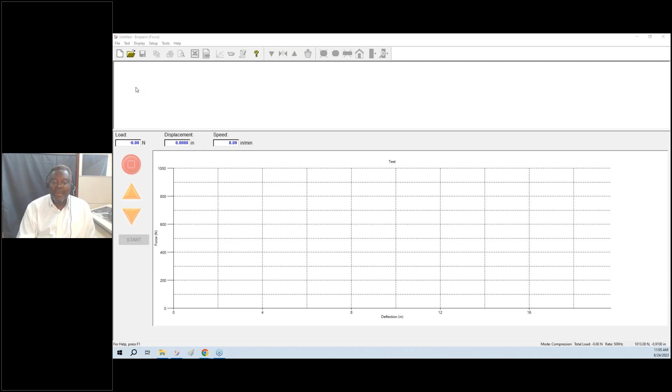So our Emperor software was designed to be simple and complex, depending on what your application requirements are. Simple to use for simple applications and for complex applications in push or pull. Now there is another version of it that does torque, but that's essentially not today's topic.

So we'll be looking at tensile, compression, and 3-point bend testing, which, if you think about it, most applications will fall under one of these 3 umbrellas. Tensile testing can be peel, it can be just pull to break. Compression testing can be push out, penetration testing, sharpness, compressive shear, and so on. And then there's obviously 3-point bend and flexure testing, which we will all look at.

So if you have any legacy type testing program or productivity program, this interface will look familiar as far as starting a new test or opening an existing test and so on. Most of the time, any test application, whether you're testing to a specific testing standard like an ASTM standard or an ISO standard or a mil spec, starts with whatever your preferences are. We'll start in our setup and the preferences.

Now, I'll go over this in general, and then when it comes to the specific testing applications, I'll kind of speed it up a little bit because we've already looked at all of the different preferences. They pretty much don't change. So now in the preferences, this is where you select your type of test.

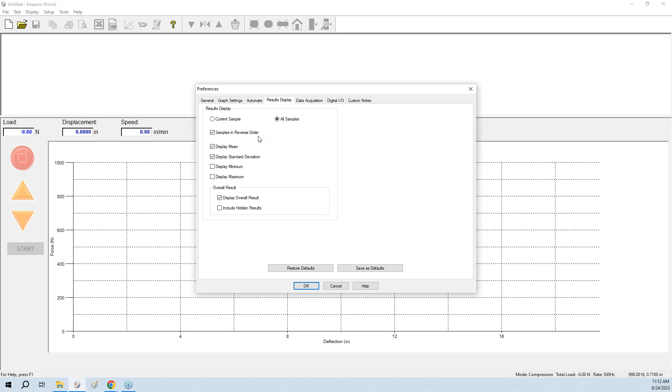And then finally, the next tab is where you select your data acquisition rate. If it's a test that takes longer to complete, especially when you're running at a slow rate of speed, then obviously you want to select a slower sampling rate. Because as I said, if you took a 30-second test, the difference between 10 hertz and 1,000 hertz is whether you only collected 300 data points or 30,000 data points. So this is where the user selects the sampling rate.

Once all these preferences are done, the operator can now go into test, select program, and then select a combination of these preset commands to create the actual testing procedure, whether it's a specific ASTM test or ISO test, or it's your own in-house custom test. A combination of these will put together a simple testing procedure. So when you click that start button, depending on what you put in those arguments, that's exactly how the test is going to run from start to finish.

So most tests will usually have a 0 command, and the reason for that is part of the process of fixturing your sample might create some residual load on your load cell, or you might have to move the crosshead up and down and have some residual displacement. Because you're not looking to transfer either of those 2 values into your test, it makes sense to tare both of those values out. And that's what that 0 command does.

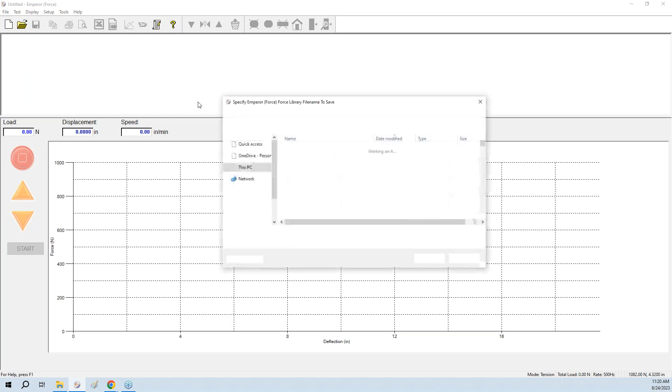And then finally, you can just throw in a time and date stamp of when the test started or when the test completed. And this is a typical tensile pull to break test where you're just looking to measure a break force. Once that entire test is configured, the next thing you do is go into File, save the library program, and we'll just call this our webinar tensile, and then save the test.

So what happens then is for all future testing, all the operator has to do when they log in is go into File, load library program, which is going to load this program. They'll put the sample in and just hit that start button, and that immediately starts the test. And then once you generate your results, especially when you have pass or fail criteria applied, you'll see what's passing and what's not. So this is essentially how we went about configuring a simple tensile test in the Emperor software.

And with that, I will turn it over back to Carl to walk you through the magic of VectorPro. Back to you, Carl. Thanks, Moses. Hopefully you can see my screen now. Am I okay on this, Sharon? You can see my screen?

Yes. Good. Okay, what we're looking at here is VectorPro. You can see that it's very, very different from what Moses just showed with the Emperor software. We've gone for a more visual, simplified, less programming approach. Emperor required you to do some programming there to create your tests. And we've also put in a lot of new features as well, because we're not just doing product testing, we're doing materials testing also. So features that we've put in here are quite important to a lot of people, particularly those in the pharma industry.

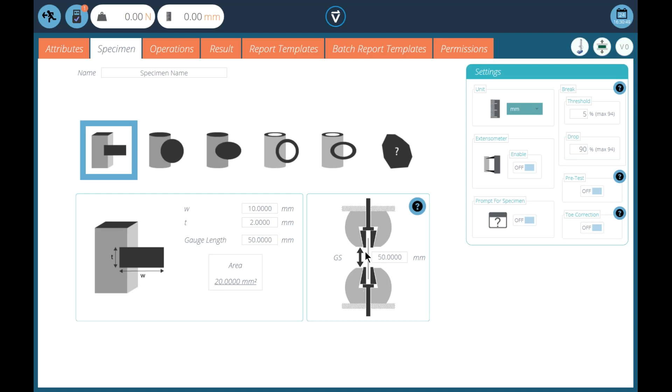Next one is the specimen tab. And here you can put in your specimen geometry. We've got different shapes. We've got an applied area. But if you're putting in things like your width and your thickness, we're calculating area. If you know the distance that you're measuring your sample over, your gauge length or your grip separation, you can also put those in there. We can have them as different values if we're using an extensometer. And if we are using an extensometer, then we can turn it on here, supporting both analog and digital extensometers.

If these numbers here are an arbitrary number for the size of the sample, but you want to measure it with a micrometer or a vernier before the test to get a more accurate result, you turn on prompt for specimen, and the operator will get this and be able to put the exact number in there before the test starts. We've got our standard SI units for the dimensions as well.

And Moses looked at doing a break in there. Here we have a little break detector section. Threshold is when we turn it on. I'll put it at 1%, and that will be 1% of the value of the load cell we're using. Once it passes this level, it will turn the break detector on. It's very useful for tests where you've got movement in the grips and fixtures at the beginning, where you've got oscillation in the load and you don't want to detect a break at that point. And then again, we're just looking for a drop in force. So we can look for a 50% fall in force from our maximum that we were pulling during the test.

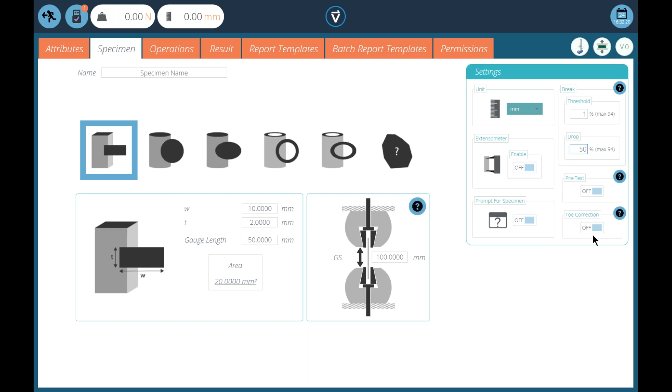Pre-test applies a small force to the sample beforehand, and if anyone's doing the ASTM tensile standards for plastics, toe correction is a way of removing erroneous strain at the beginning of the test in accordance with the standard.

So whereas Moses before was typing in the code's individual lines, we've wrapped all this up now in a visual. So here on the settings page, you can apply your SPC if you set one up. And here you have all your SI units that we can use. And you can change your data rates here. And obviously you've got pounds force, kilonewtons, all your standard SI units.

We can put a shield on things if we want here. So if we were using a small grip with a large load cell and we were worried about damaging the grip, we could apply a force here on a shield and it would stop the test if it hit that value and protect the grip. We have a little bit of automation here. So if you're doing repetitive samples, we can prompt you to keep starting the test again and again by turning this on and putting in a delay which is comfortable for you to swap the sample out.

And the way we program this is we have a timeline which runs left to right. You can put up to 40 operations in there, and we have a toolbox to populate it. So we'll do the same test that Moses did. So the first thing we do is we'll drop a zero in. So there's no programming to be done, exactly the same as Moses did. And we're going to pull to break. So we have a pull to break icon. We just choose the speed that we want.

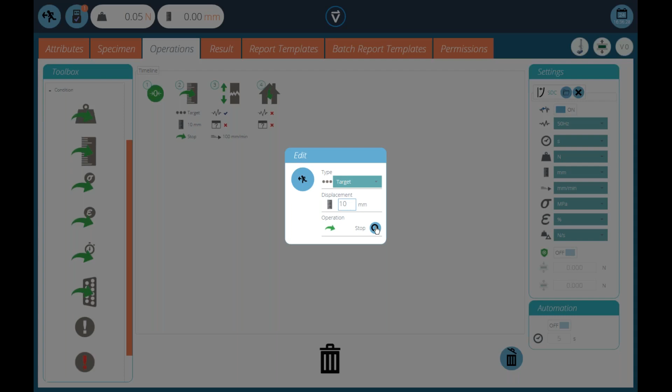Conditions are what we call conditional jumps. And again, this is very similar that if we're monitoring something and we're looking for a change, let's say a change in displacement of 10 millimeters, then we can stop the test. Or we can jump to a different location in the timeline, and then it tells you where you're going to jump into, number 4, when that condition is met.

And we have those for load, displacement, stress and strain, time, change in digital signals. We have abort, we also have stop the test and abort the test. So those are the conditions. We've got digital outputs as well. So if you want to set digital lines on the stand, set them to 0, you can drop them in here. They're useful for automation purposes.

You choose your digital line, and it'll set digital line output 8 to 0. And then you can also change that to a 1 or any other one at any point in the test. And finally, here we have the Vector Cloud Solutions, which is part of our unique feature that we have cloud sharing facilities, and this is really good for people who want to share tests and data. We'll have a brief look at that later.

So I'll set my test up, and now I need some results. So I have my toolbox and my area here, and all I need to do is populate the results I want. So maybe the time I started, who did it, some information on my sample. There's my attributes. Maybe you want the test name in the report, your sample ID, and we just drop them in. We've got standard calculations. We've got lots here, and you can use these as many times as you want.

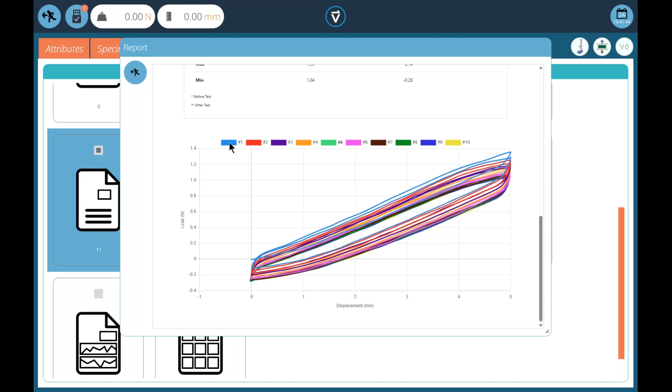We can turn things on and off in this test if we want. And there we're just generating our results and our graphs. This is just test data, by the way. We can actually turn this off as well and just show whatever we want in the graph template itself. Once that's set up and saved, and we come out, it's done. If we're doing batch reporting, we've got templates for the batch reporting.

And we had permissions on the front screen. We've also got permissions for this test, so we can edit what the operators can do. The day shift might want to just sit at a workspace and execute a test, but we might not want anyone deleting a sample. So when they log on, they will see a completely different view. And that's the test set up.

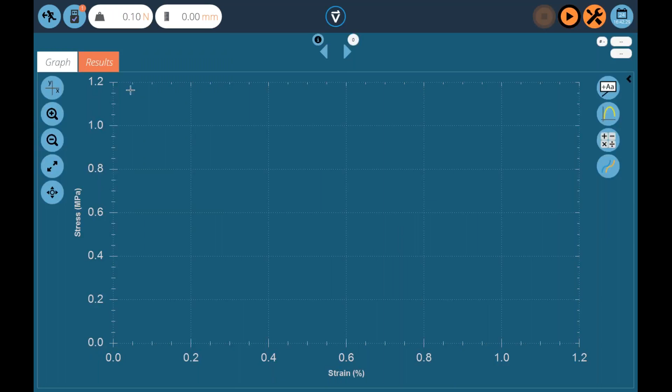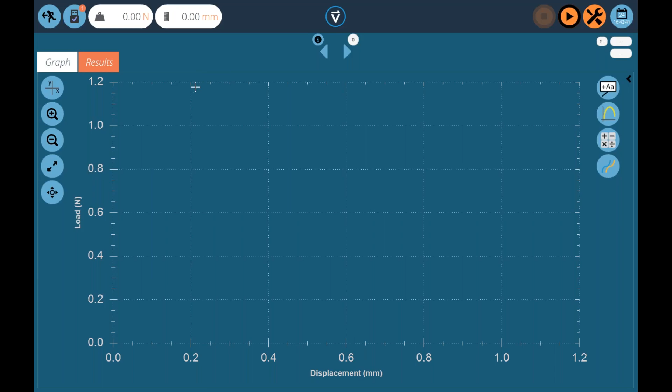We'll save our changes. And when we're ready to test, we click on the play button, and we have our graph. At the moment it's stress strain; we can flip the axis to something else. And we press the play button, and once we've done that, we're off and testing. So I'll hand you back over to Moses, and he will take you through another test on Emperor.

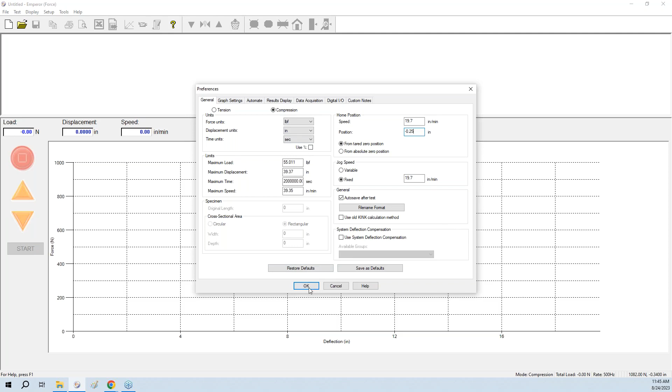The next step is to configure the actual test. Again, could be an ASTM, could be an ISO test, could be an in-house test. As always, this time we're also going to start with zero load and displacement, append. We're going to clear data, append. And then we're going to do an initial run, which is our touch command.

So we'll run at a relatively slow speed of 2 inches per minute, and we'll run to a very minimal force of about 1/4 pound. And that's essentially to allow the probe to touch the top of the sample without starting to compress it. That way we don't lose what the true displacement is in our test measurements. So we'll run at 2 inches to that preload or the touch force.

And then one of the things I prefer to do is zero, clear data again, and we'll essentially do all of this again. However, this time, instead of running to a load, we will run to a compressive displacement. If you expect this sample to break, once again, you can put in that break percentage drop, and we'll update that. Then we're going to throw in the end command, which essentially completes the test.

So all we're doing is run to a touch, zero everything out, run to a displacement of 5 inches or break, whichever comes first, return home. That essentially completes the test. And then the final step is to determine what kinds of data we're looking for. Once again, we're looking for a peak. We're going to call this a max compression for purposes of our test. Once again, we can run this through pass or fail criteria.

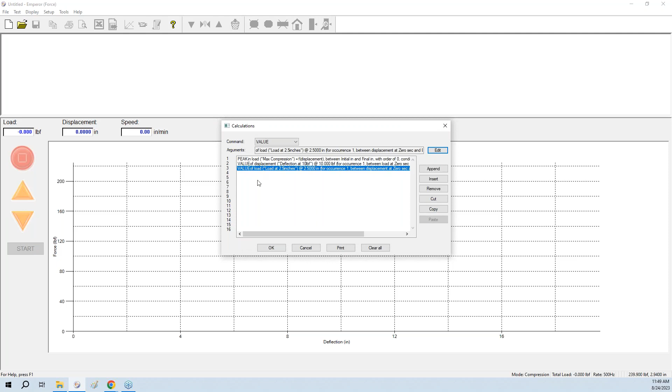Click OK. So now we have a simple compression test that would come down, touch on the surface of the sample, compress to a known displacement, give us the peak value, but then we can also query additional data like a load at a specific displacement or a deflection at a specific load. And that's essentially what a typical compression test looks like. And these can be used for all kinds of different samples, fertilizer pellets, springs, and so on. That's what that looks like in the Emperor software.

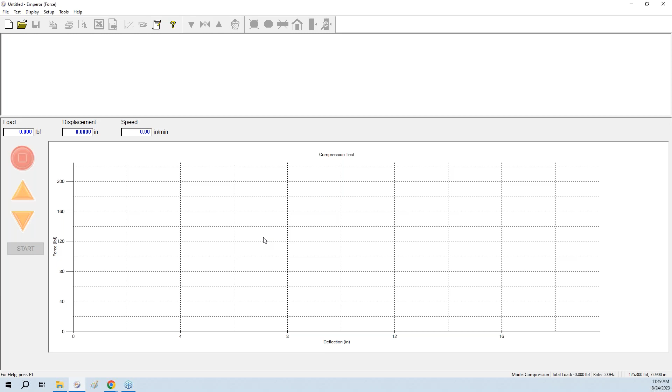And with that, I will turn it back over to Carl to bring us home. Over to you, Carl. Thanks, Moses. You see my screen okay? Yes.

Okay, so we'll do the same thing. I'll pick the same machine. I'll just give it a name for the test. Say okay, but this time we'll pick compression. We'll stick with all our graph axes. And we have the same setup again, where we can put in a sample ID. We've got our specimen if we want to do it. We've got our break detection we can set up.

But this time in operations, there's something slightly different. So we're going to do a zero. We're going to do a touch on. So we just give it our touch on force and our touch on speed. Do we want to capture data? Not for this one, but we can turn it on and off individually for things. And then Moses went down and compressed it to a displacement. So we'll put in a target displacement.

And we'll do a displacement of 50 millimeters at whatever speed we want. And when we've finished, we can come back to our beginning of the test. That's essentially set up now. If I want some results in there, standard results. Moses was talking about things, so we'll put some standard results in. Let's do a value.

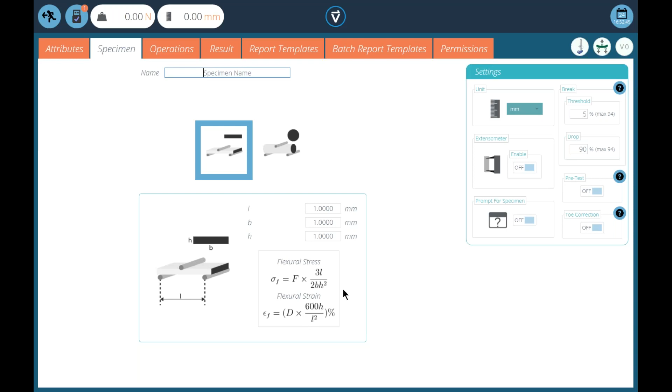And one other thing I will say with the other test as well, you've also got your 3-point bending, which will have the same functionality, and also in operations, we've got the bending. This time we're applying flexural stress and flexural strain formula to all the load and displacement results to generate stress and strain data. So that is a slight difference of what we're doing with the bending test.

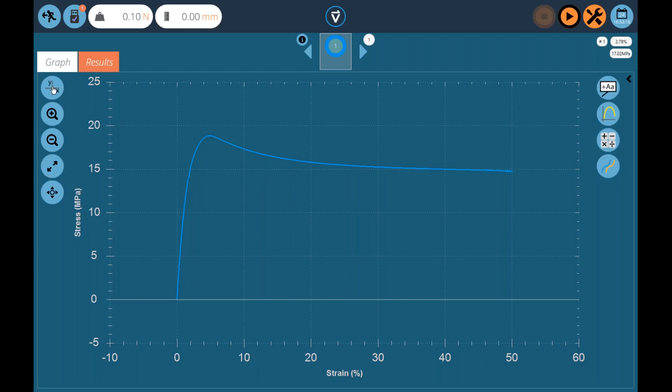One of the other things we've got in here, we'll look at a result. So I'll look at this one result here that we've got. You can view the result. This is where all your results will be put. If we go view the result, there's the test. You can see the test graph data. And there we've got our graph functions here. I'm looking at stress and strain, but if I wanted, I could look at any axis I wanted.

And there's our results. So we're looking at area, tensile. We'll put some extra results in here. If you want to actually physically look at that result for that graph, it will show you. If you wanted to change any of these, you can by clicking outside, and it will take you back to the edit field. So if you've got existing data, you can actually change these and put in whatever you want.

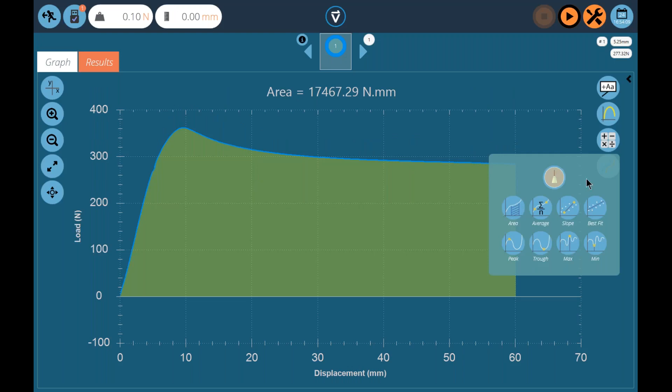And there's some calculations that we've done for different types of nominal strain. So it's quite powerful. You've got statistics, which obviously the more you have in here, the better. But if you're looking at a graph and you want some quick calcs on here, you can do the same thing there. It's all very visual. So I think we've nearly finished on that now. So we'll go back to the presentation overview.

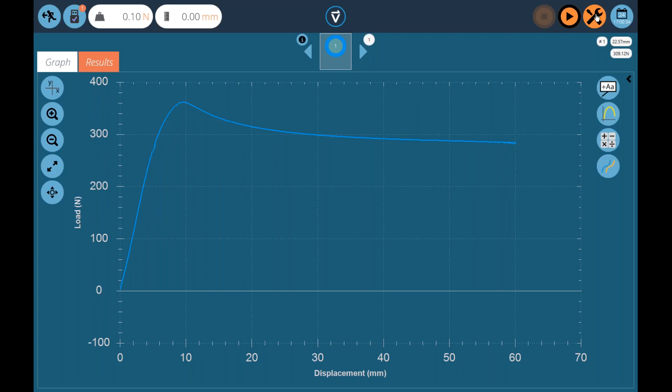And then when you're doing testing, we have some functionality. If you look in the operations here, if I was to do a target here, I could say move 100 millimeters at a speed relative or absolute. So we can move relative or absolute on that. And there is also at the bottom of here where we can move to a percentage of, we call it fractional displacement.

So wherever you are when you start this operation, if you touch the top of a bottle or a piece of foam or something like that, you are 100% away from your absolute position. So if you compressed it by 50%, it would move from that position down 50%, or up 50%, to get to that percentage point there. Make sense? Thanks, Carl.

At the beginning, you have to indicate in the VectorPro software whether you want to test tension or compression. Why do you have to enter a sign, either a plus or a minus, in the program? Not sure I understand that question. Okay, can you repeat it again? I can. Otherwise, we can reach out to them directly via email. Yeah. But it said at the beginning you have to indicate in the VectorPro software whether you want to test tension or compression. Why do you have to enter a sign such as plus or minus in the program? Ah, right, I'm with you.